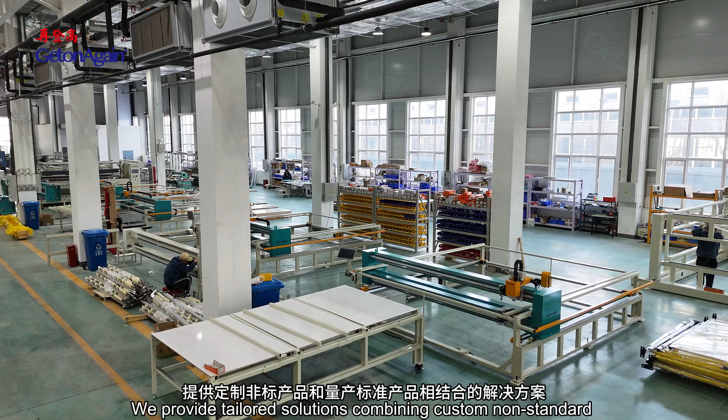We provide tailored solutions combining custom non-standard products with mass-produced standard products, including mechatronic machines, automated production lines, and intelligent factory solutions.

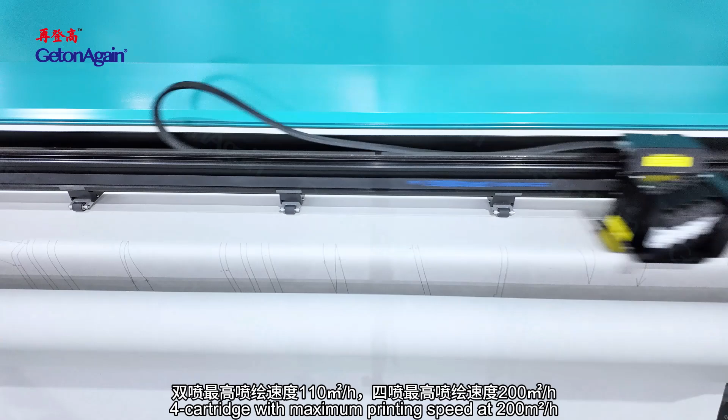Pattern room equipment includes magic inkjet plotter, 2 cartridge with maximum printing speed at 110 square meters per hour, and 4 cartridge with maximum printing speed at 200 square meters per hour.

Vertical inkjet cutting plotter, 1 machine multiple functions, pattern drawing with cutting, or standalone drawing. High-quality rotary cutting knife can cut minimum 80 grams per square meter paper for sample design, cost saving.

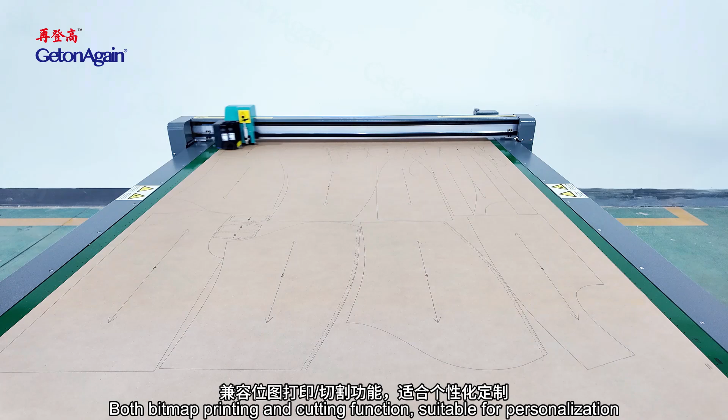Flatbed inkjet cutting plotter, both bitmap printing and cutting function, suitable for personalization, configured long knife or short knife, and optional fixed knife sleeve or elastic knife sleeve, suitable for cutting various materials.

Digitizer, easily reading paper patterns, convenient positioning, simple operation, accurately reading patterns, enables speeding up the design. It is a powerful tool for traditional manual drawing digitization.

Digitizer can be used in various fields, such as clothing industry, fashion design, surveying and mapping, mining, stamping and environmental protection, etc. Flatbed scanning digitizer.

One button to start after placing scanning pieces. Can vacuum absorption auto scanning, auto transmission. According to different models, supports ultra long width scanning. Scanning speed up to 7,200 mm per minute. Scanning resolution 150 to 300 dpi. High definition panoramic 1:1 image to ensure effective identification of various contours, notches, and inner holes.

Cutting equipment includes automatic spreading machine. Easily set the spreading method, length, speed, quantity and sections, with intuitive as well as simple operation. Dual use for both knit and woven fabrics, suitable for t-shirts, children's clothing, loungewear, and toy textiles.

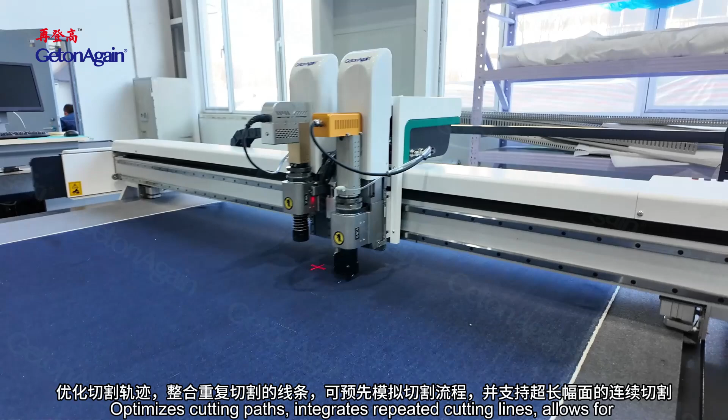Automatic single layer cutting machine. No need to create specialized cutting molds. Cutting can be performed precisely by directly importing CAD design drawings into the equipment. Optimizes cutting paths, integrates repeated cutting lines, allows for pre-simulation of the cutting process, and supports continuous cutting for extra long materials.

Stripe and plaid matching cutting machine, equipped with a few HD industrial cameras, according to the capture size, performs intelligent combination, ensuring high accuracy fabric image capturing.

Stripe and plaid matching auto cutter, equipped with double knives and pen draw punching working mode, special for various stripes and plaids fabric cutting in single ply.

High-end clothing customization: the effect of the alignment matched stripe and plaid process has become an important measurement of the quality of this type of clothing. Stripe and plaid auto cutter is the equipment specially developed for this process to meet matching stripe and plaid clothing, suitable for single ply cutting.

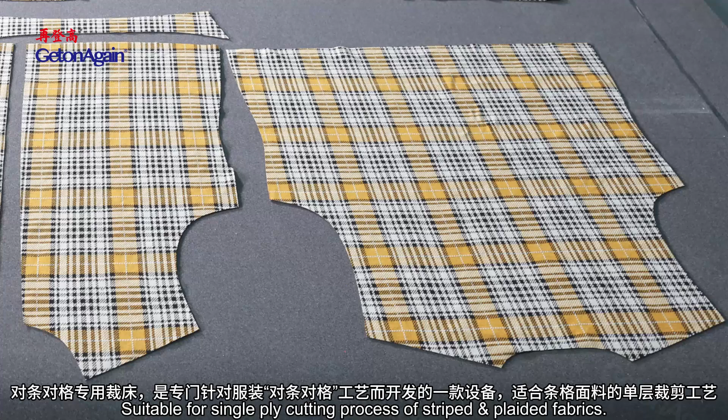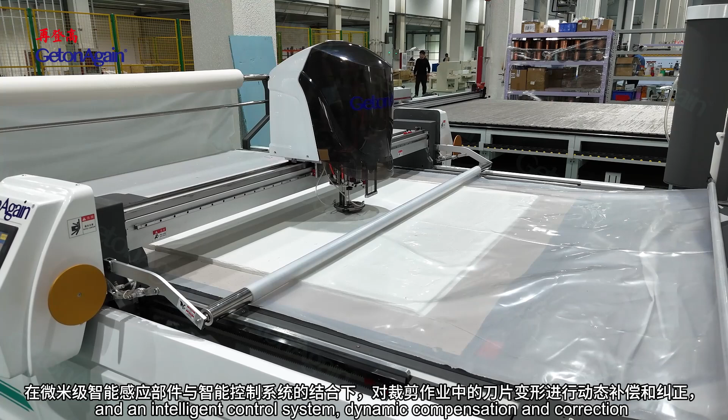Process of striped plaided fabrics. Automatic multi-layer cutting machine, through the combination of micron-level intelligent sensing components and an intelligent control system, achieves dynamic compensation and correction of cutter deformation during cutting operations, significantly reducing errors between the top and bottom layers of fabric during cutting, enabling truly high-precision intelligent cutting.

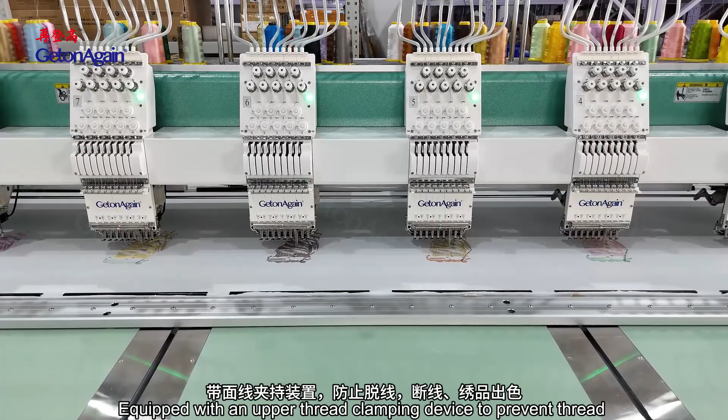Computerized embroidery machine: high-speed embroidery head with extremely low failure rates, long service life, low noise, and stable, reliable quality. Equipped with an upper thread clamping device to prevent thread detachment and breakage, ensuring excellent embroidery results. Suitable for textile and garment manufacturing, footwear, hats, bags, home decoration, automotive interiors, and industrial products area.

Embroidery equipment includes Cloud Smart Teaching Embroidery Machine, suitable for integrated theoretical and practical teaching of computer embroidery in fields such as fashion and apparel design, clothing design and engineering.

Computer Precision Embroidery Machine features a high-speed sewing head with extremely low failure rates, long service life, low noise, and stable, reliable quality, suitable for embroidering small letters, premium garments, high-end home textiles, footwear, hats, and automotive products with embroidery, etc.

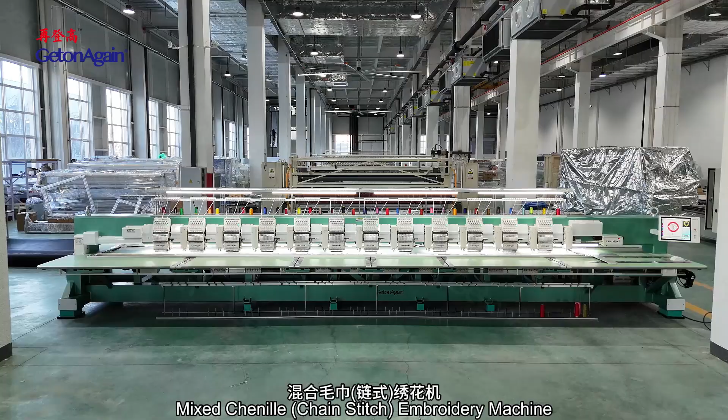Mixed chenille chain stitch embroidery machine. Mixed embroidery feature, according to color sequence settings, switchable between chenille embroidery and flat embroidery, simplified operation. Chenille needle height can be adjusted to 10 levels according to chenille pile height or chain stitch thread thickness.

Multifunctional embroidery on garment, shoes, caps, home textile, toys, bags and luggage, art craft, etc.

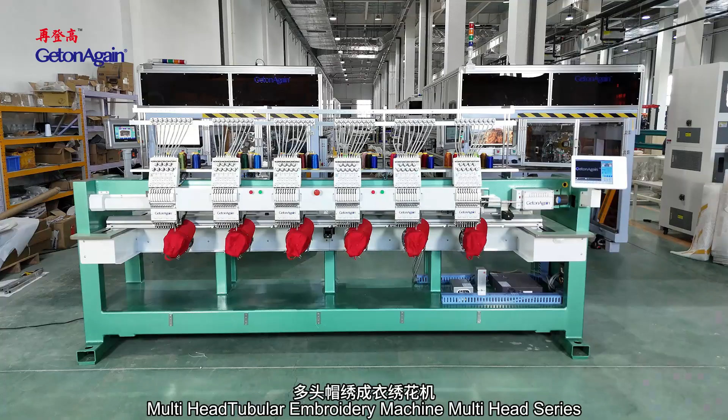Multi-head tubular embroidery machine, multi-head series, suitable for embroidering on flat, caps, garments, shoes, belts, bags, etc. Auto thread trimmers, auto color change, auto thread break detection, 270 degree wide angle cap system, red light locating, LED lighting, precise head and drive system to ensure exquisite embroidery work.

Drop tables, easy to lift up and down. Multiple heads greatly improve work efficiency, suitable for embroidery shops and factories of a certain scale.

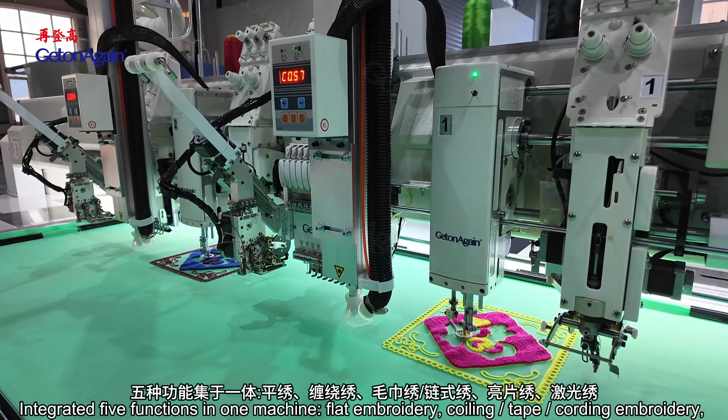Computerized 5-in-1 embroidery machine integrates 5 functions in one machine: flat embroidery, coiling, tape cording embroidery, chenille and chain stitch embroidery, double sequin device, and laser cutting function. High precision, strong stereo sense, ideal artistic effect, suitable for embroidery of apparel, home textile, furniture, teaching, design and arts and crafts, etc.

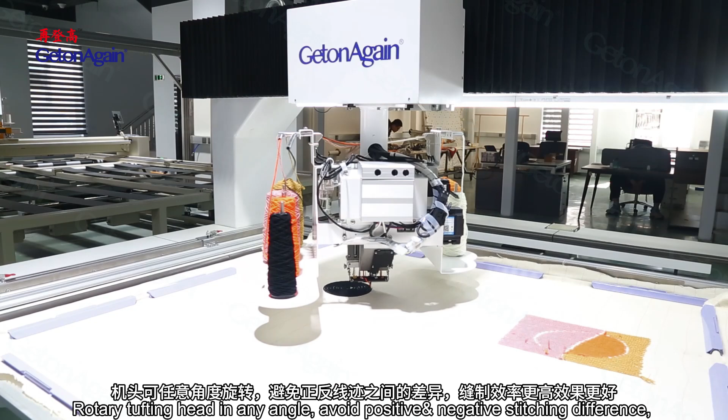Tufting series equipment includes computerized tufting machines with a rotary tufting head that rotates to any angle, avoiding positive-negative stitching differences, resulting in higher efficiency and better tufting results. Suitable for various rugs, carpets, hanging carpets, tapestry, and other flooring decorative and home furnishing products tufting.

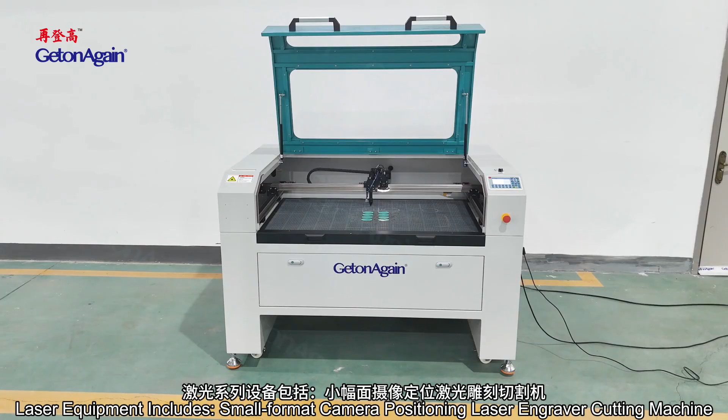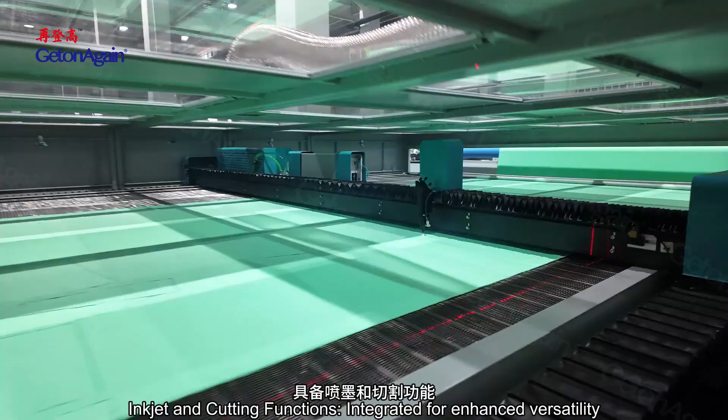Fully automatic large format laser cutting machine with inkjet device. Large format automatic feeding system designed to meet requirements for feeding and cutting whole rolls of fabric. Inkjet and cutting functions integrated for enhanced versatility. Applicable to industries such as custom clothing, single-piece cutting, sofas, toys, footwear and headwear, textile print pattern positioning cutting, automotive interiors, industrial filtration, and advertising, etc.

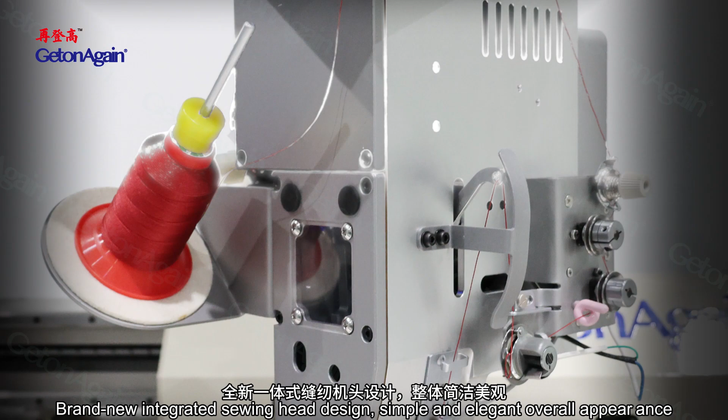Sewing equipment includes an automatic arbitrary rotary single needle leather sewing machine, suitable for automated leather pattern sewing in the fields of automotive interiors, car seat covers, car door panels, airplane seats, and leather furniture upholstery. Brand new integrated sewing head design, simple and elegant overall appearance.

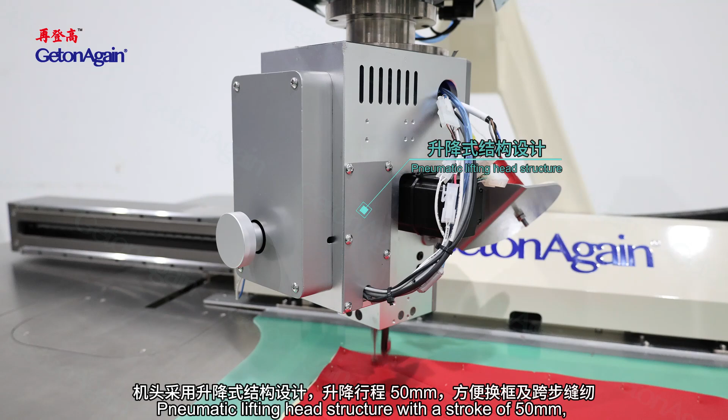15-inch HD industrial touch control screen. Two-size workbenches designed with a flexible mechanism, reducing size after folding for easier transportation. Sewing head can rotate at any angle, avoiding differences between forward and reverse stitches, improving sewing efficiency and stitch quality. Pneumatic lifting head structure with a stroke of 50 mm, making frame changes and span sewing more convenient.

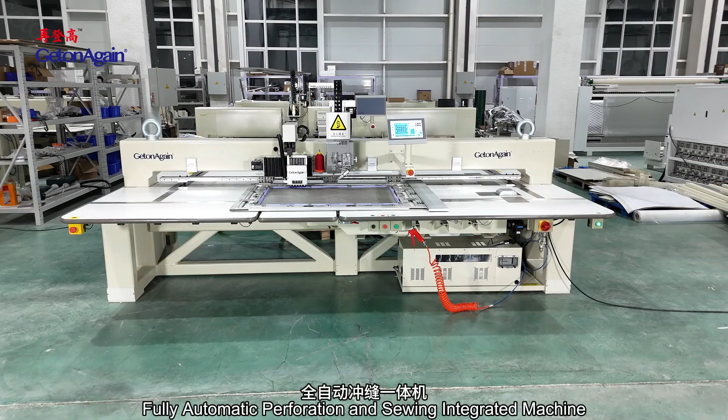Fully automatic perforation and sewing integrated machine. The punching machine head is specifically designed and developed for leather materials, equipped with various round punching tool specifications. Sewing head up moving stroke is 50 mm, providing sufficient space for material loading and easy operation. Suitable for perforation and sewing processes of various types and thicknesses of genuine leather and microfiber leather used in car seats, automotive interiors, aircraft seats, luggage, furniture, and more.

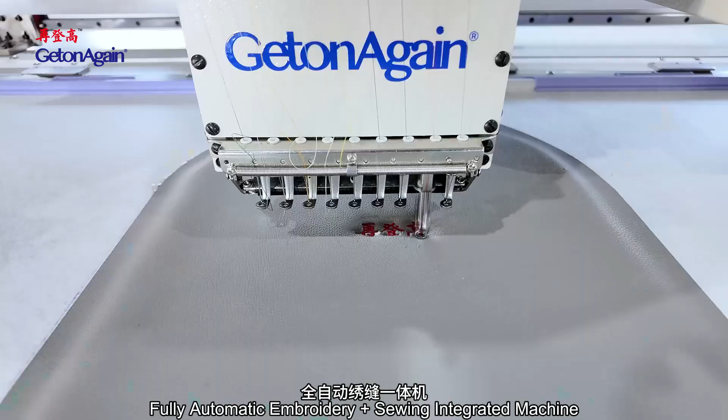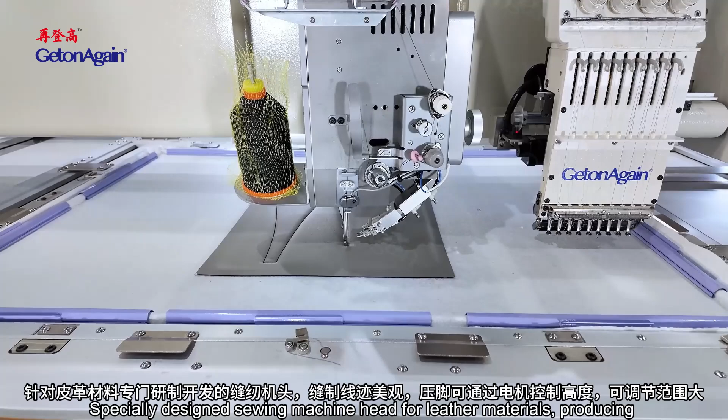Fully automatic embroidery and sewing integrated machine. 9-color embroidery machine head to meet the embroidery needs of different industries. The embroidery thread clamping mechanism incorporates a novel upper thread clamping assembly, effectively reducing thread breakage and slippage occurrences during operation. Specially designed sewing machine head for leather materials, producing beautiful stitching.

Presser foot height is motor controlled and highly adjustable. Sewing machine head has an up-down moving stroke of 50 mm, providing ample space for material loading and ease of operation. Suitable for various types and thicknesses of genuine leather and microfiber leather for automotive seats, car interiors, aviation seats, luggage, furniture, etc., combining embroidery and sewing processes.

Fully automatic perforation special hole and embroidery and sewing rotating head machine. Integrates punching, embroidery, and sewing into one machine, allowing for arbitrary pattern design and seamless combinations of punching, embroidery, and sewing for complex processes.

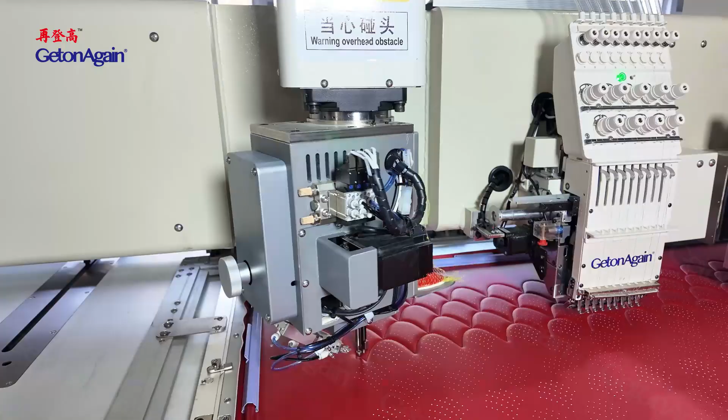Specially developed punching machine head for leather materials. The 9-color embroidery head meets the embroidery needs of various industries. Sewing machine head features an arbitrary rotation structure, creating beautiful stitching, reducing frame movement frequency, and improving efficiency. Suitable for punching, embroidering, and sewing processes for various types and thicknesses of genuine leather and microfiber leather used in automotive seats, car interiors, aviation seats, luggage and furniture, etc.

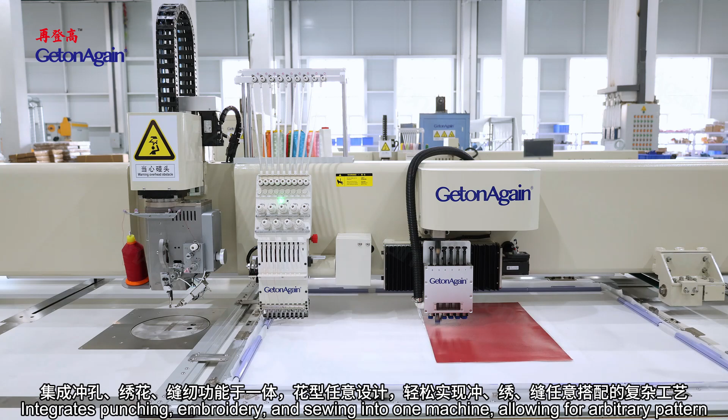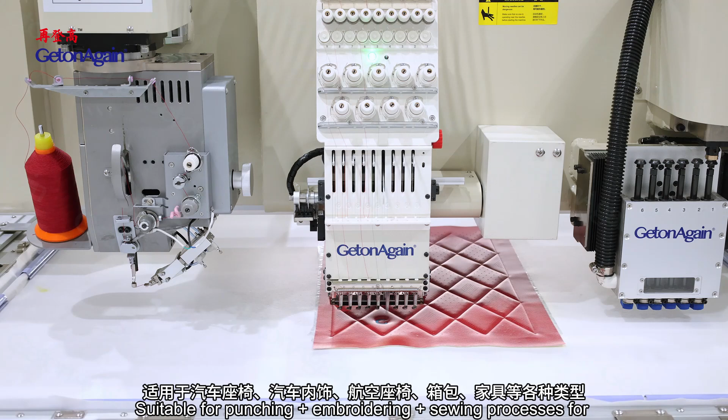Fully automatic perforation round hole embroidery sewing rotating head machine integrates punching, embroidery, and sewing into one machine, allowing for arbitrary pattern design and seamless combinations of punching, embroidery, and sewing for complex processes. The 9-color embroidery head meets the embroidery needs of various industries. Sewing machine head features an arbitrary rotation structure, creating beautiful stitching, reducing frame movement frequency, and improving efficiency. Suitable for punching, embroidering, and sewing processes for various types and thicknesses of genuine leather and microfiber leather used in automotive seats, car interiors, aviation seats, luggage and furniture, etc.

Automatic template sewing machine, rotary head, heavy material. Both the X and Y axis use a screw and slide transmission method, providing high precision and good stability. Suitable for pattern sewing on leather and heavy materials, such as car seats, sofas, massage chairs, boat interiors, and aircraft seats. The machine head can rotate freely to ensure the quality of the sewing stitches.

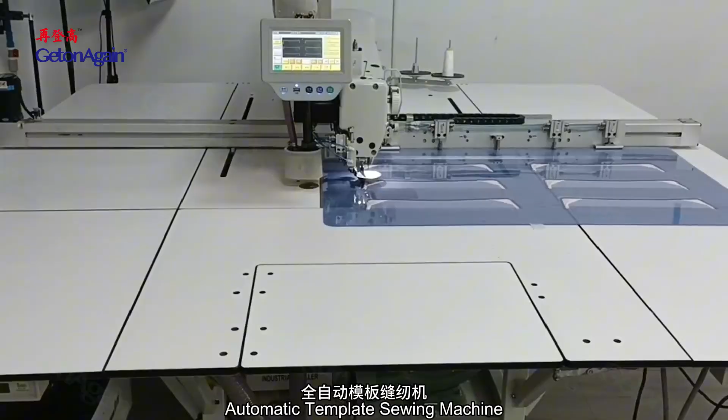Automatic template sewing machine with double belt, double guide rail, double stepper motor structure. The machine head adopts oil-free lubrication, and the rotary shuttle adopts oil-line lubrication technology to completely eliminate fabric pollution. Identify patterns through RFID barcodes and automatically switch to the corresponding sewing program for quick sewing. Used for template sewing processes such as opening pockets, notches, bag covers, collar trimming, etc.

Pattern sewing machine: this machine can easily sew 1,200 thick thread with a thickness of 12 mm, with 2 times large rotary hook, automatic thread trimming, and maximum sewing speed reaching 2,500 RPM.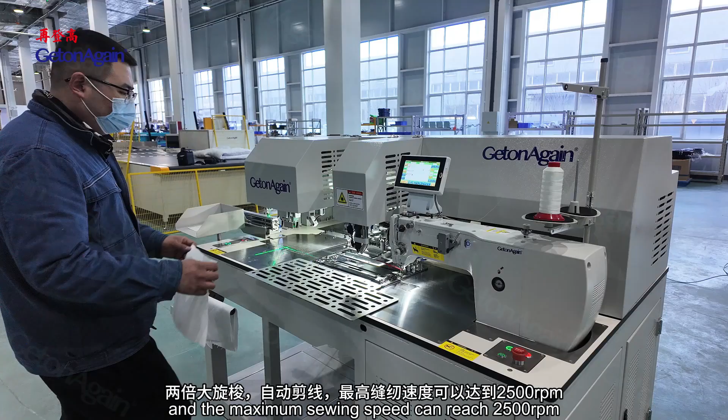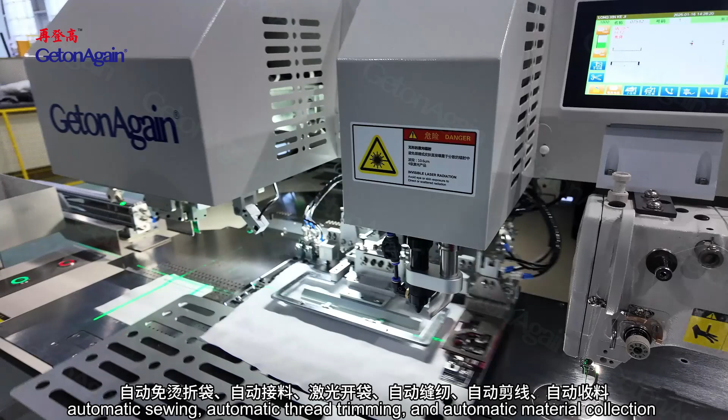Automatic laser pocket opening machine: automatic ironing-free pocket folding, automatic material feeding, laser pocket opening, automatic sewing, automatic thread trimming, and automatic material collection. For front and back pockets of men's and women's clothing, suits, inner and outer pockets of jackets, dress pants, hoodies, sun protection clothing, school uniforms, sportswear, cotton padded jackets, down jackets, workwear, jackets, uniforms, trench coats.

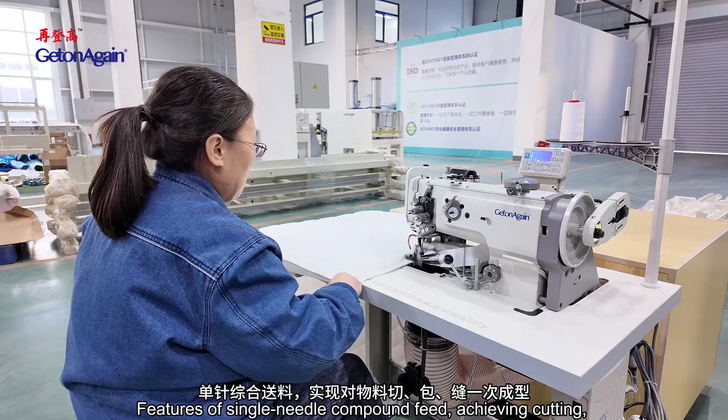Quilt edge binding machine, featuring single needle compound feed, achieving cutting, binding, and sewing in one seamless operation.

Enlarged right side waste discharge port with pneumatic waste discharge assistance ensures smoother disposal of waste generated during edge cutting. Special synchronized feeding structure includes alternating presser foot, needle, feed dog, and binding attachment, ensuring no wrinkles or misalignment during straight line or corner sewing for a flawless binding effect. Designed for edge binding processes of quilts such as cotton quilts, summer quilts, spring and autumn quilts, and other bedding items.

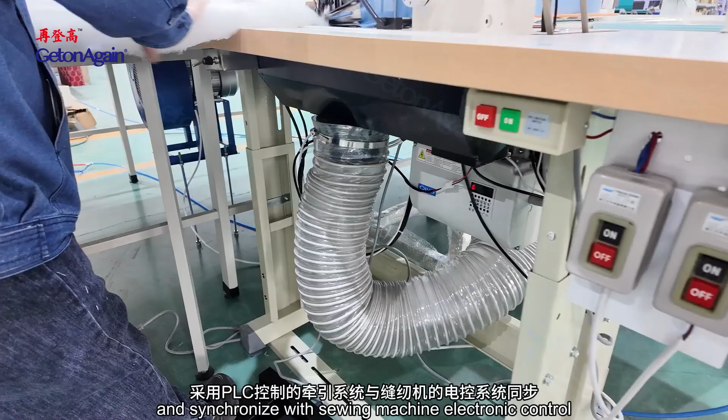Quilt and mattress binding with pulling sewing workstation. Equipment factory standard provides an air floating table and automatic pulling device, making sewing worker operation easier and smoother. Equipped with PLC controlled pulling device synchronized with the sewing machine's electronic control, these two machines work at the same speed and synchronize direction. Optional automatic storage and vacuuming device improves efficiency, reduces dust emissions, and provides the sewing operator a clean and tidy working environment.

Binding result is rich with a strong, solid feel. Corners are smooth and nice, with evenly stitched lengths, no hairy edge, no edge folding, and no corner raising effect or other negative symptoms.

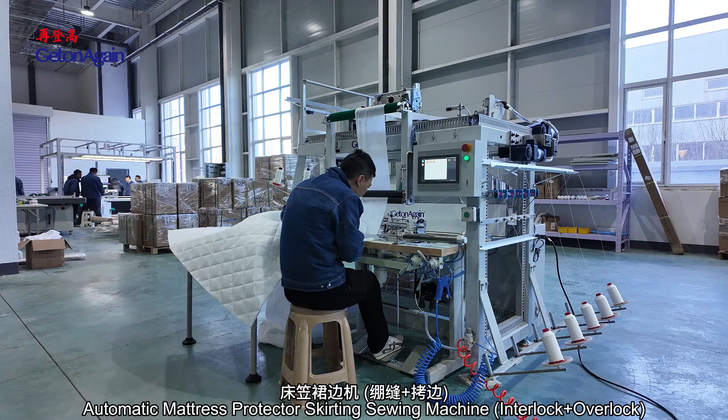Automatic mattress protector skirting sewing machine, interlock and overlock. Suitable for processing fitted sheets, completing in one pass the binding stitching of elastic rope cord and bed skirt, and the overlocking of bed skirt to mattress protector topper layer.

Multi-hole bar tacking machine: press arm and sewing frame work synchronously, ensuring high precision bar tacking. Suitable for chair pads, cushions and pillows with fillings, and bar tacking requirements for reinforcing sewing work.

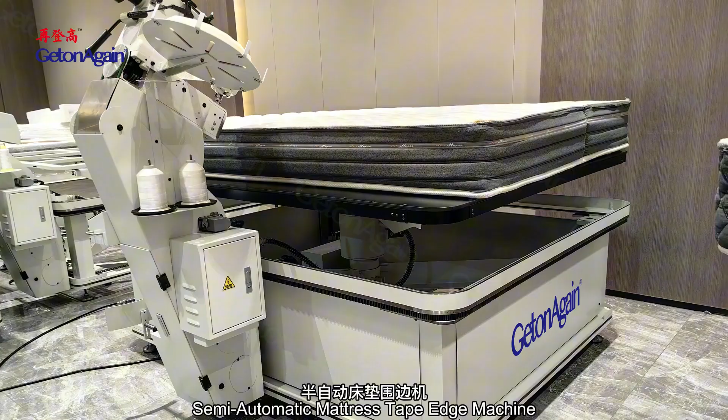Semi-automatic mattress tape edge machine, primarily designed for sewing spring mattresses, efficiently completing edge overlocking between mattress fabric and sidewall fabric. Also suitable for sewing other types of mattresses and sofa cushions. Key features include an electrically adjustable work table with high strength independent support, ensuring exceptional stability during operation.

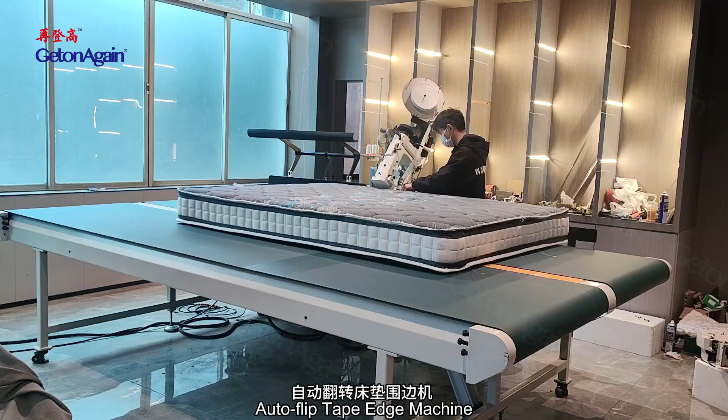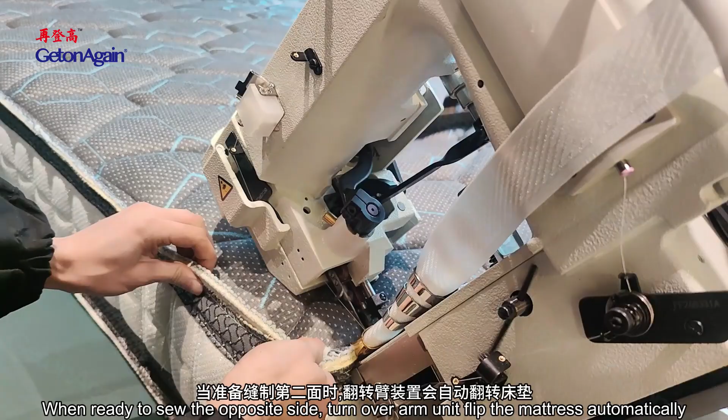Auto flip tape edge machine: automated transfer table and mattress turnover arm enable the operator to work in one position without moving around. Variable speed drive automatically slows down on turning corners, and the machine head can rotate freely to ensure the quality of sewing stitches. When ready to sew the opposite side, the turnover arm unit flips the mattress automatically. Machine head height and inclination are adjustable.

Industrial sewing machines include various overlock and lock stitch machines.

Computerized synchronized hot cutting binding machine, designed for products requiring binding processes, equipped with a standard pneumatic hot cutter. The binding tape no longer requires manual cutting; simply press a button to complete precise cutting. The hot cutting edges are clean, with no fraying or loose threads, significantly improving production efficiency.

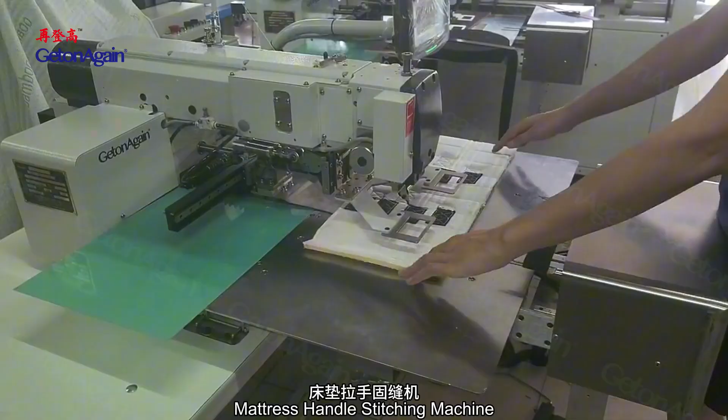Mattress handle stitching machine: fully automatic operation, controlled via touch screen. Customized stitching patterns are possible, significantly improving production efficiency. Easy to operate, with precise positioning.

Flat tape edge machine, mainly used for stitching between mattress fabric and side border, suitable for sewing other soft mattresses, bedding, sleeping bags, and tents. Stable performance, little vibration, low noise, and high efficiency.

Long arm label sewing machine, adopting connecting rod thread pickup with a large rotary hook. The needle bar swings up and down, feeding simultaneously to form zigzag lock stitch. A reasonable swing mechanism makes switching between zigzag sewing and normal lock stitch easy and free. Upper and lower synchronous feeding structure makes it easy to operate, with good sewing effect and beautiful stitches.

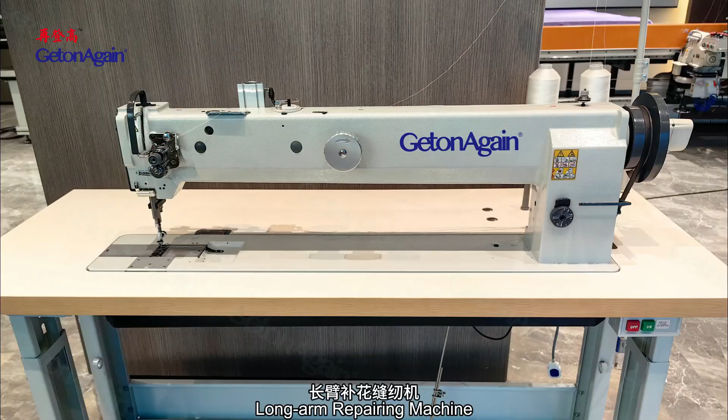Long arm repairing machine, mainly used for applique work on mattress crepe fabric. The upper and lower shafts of the machine are of integral structure, and a Taiwan-made servo motor is used to automatically position the needle. The new presser foot is equipped with a needle bar lifting device to make thick fabric application more convenient and beautiful.

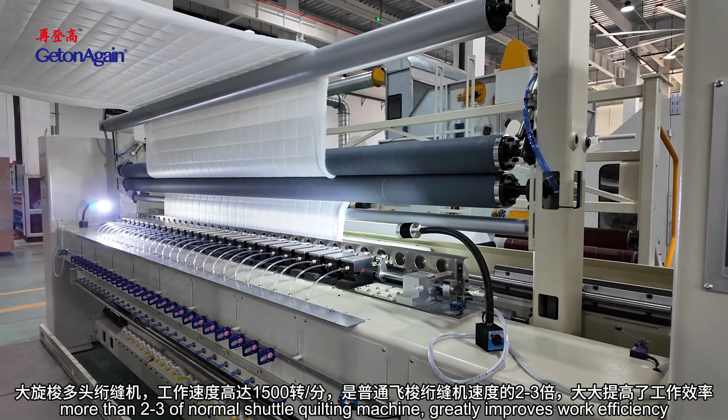Quilting equipment includes the computerized multi-head rotary hook quilting machine model and double row lock stitch multi-head quilter with large rotary hook. Max speed of 1500 RPM, more than 2 to 3 times that of a normal shuttle quilting machine, greatly improving work efficiency. A 3-fold capacity rotary hook means less bobbin changing frequency, beautiful stitches, no lost stitch, and no thread loops.

Computerized multi-head rotary hook quilting machine model E features a 5-time jumbo rotary hook, less bobbin changing frequency, beautiful stitches, no lost stitch, no thread loops. The interval between the upper and lower needle bars can be adjusted to any value from 3 to 9 inches. The lower needle bar can move half a needle pitch in the X direction, so quilting needle bars of different sizes and patterns can be combined, especially for non-standard size patterns, achieving a unique effect.

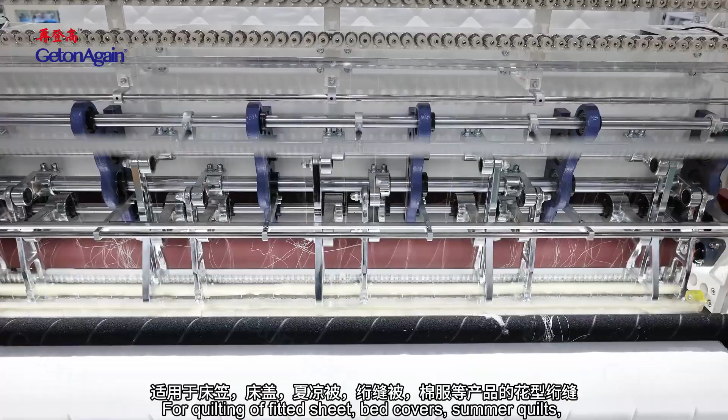Computerized multi-needle shuttle quilting machine, flying shuttle, for quilting fitted sheets, bed covers, summer quilts, and clothing products with quilting patterns.

Computerized multi-needle chain stitch quilting machine. Servo motor-driven rollers and lead screws ensure precise quilting patterns, suitable for mattresses, mattress covers, sofas, bedding, home textiles, and home decor.

Computerized single needle quilting machine lifting head. The extendable quilting frame can be freely adjusted according to required size. GetonAgain quilting head with independent presser foot drive, suitable for various materials with different thickness.

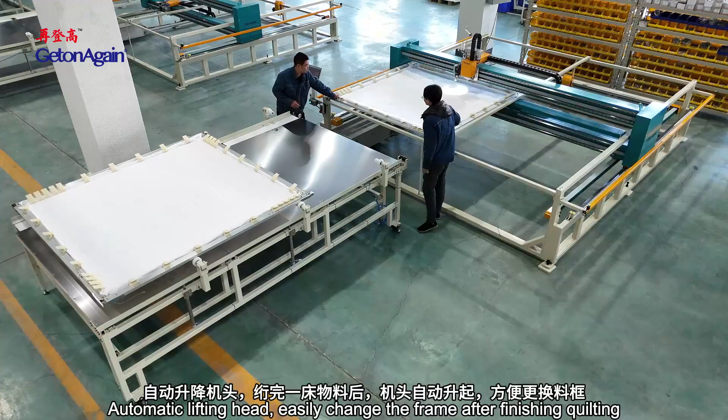Full servo motor control provides powerful and accurate driving force. Automatic lifting head easily changes the frame after finishing quilting. New quick frame changer optional. Quilting process for home textile products such as quilts, comforters, mattress protectors, blankets, sleeping bags, and single needle art quilts.

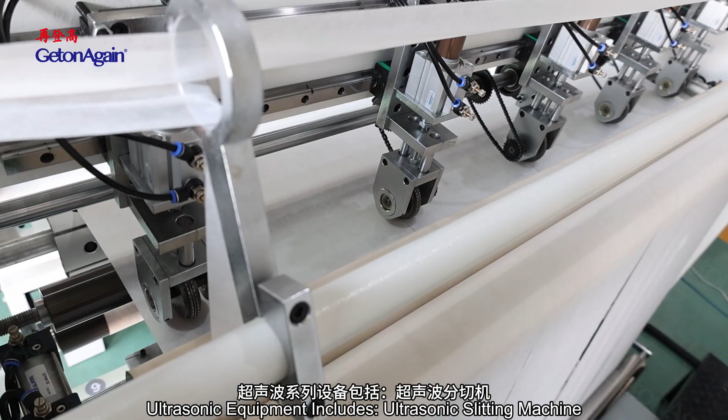Ultrasonic equipment includes ultrasonic slitting machine, adopting ultrasonic cutting technology. This ensures smooth cutting edges, precision edge cutting, no deformation, no fraying, no fiber pull, and no edge curling problem after cutting. Cutting rollers and patterns can be customized to meet various needs.

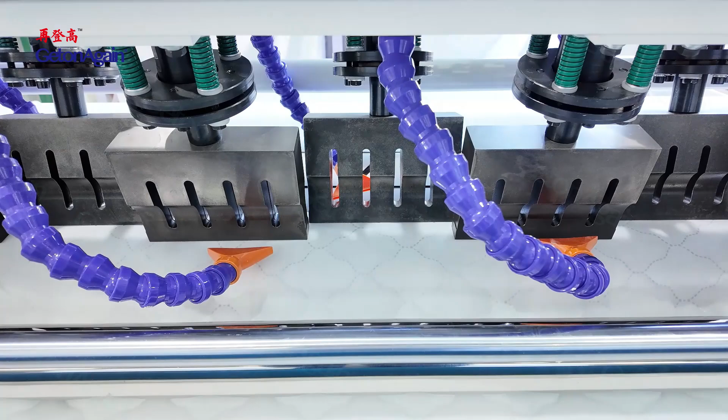Automatic ultrasonic quilting machine integrates ultrasonic sewing and ultrasonic edge sealing and cutting automation into one, completing the process in a single step. The latest structure design with interleaved transducers ensures embossing seamless non-wrinkles. After quilting, it can be connected with a cutting machine for the finished product or a rewinding device for fabric rolls.

Ultrasonic quilting machine bonds multi-layers of polyester fabric, non-woven fabric, polyester wadding, or artificial leather, and embosses different patterns on it. Patterns are clear and beautiful, fabric doesn't deform, with strong bonding and high efficiency.

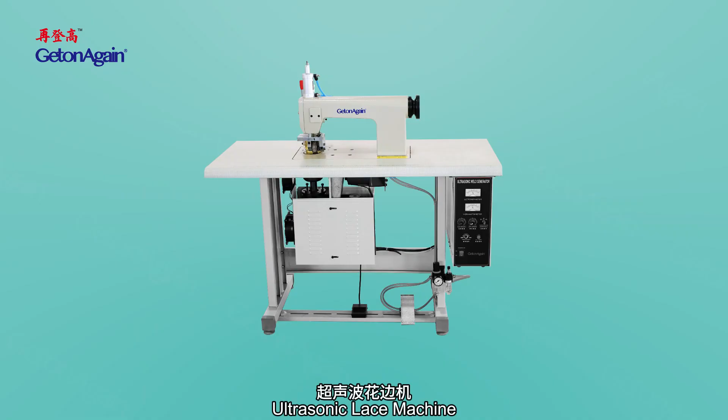Ultrasonic lace machine with ultra-high power output and adjustable power to meet the welding and cutting requirements of different materials and thicknesses. Mold size ranges from 23 to 60 millimeters.

Mold lifting system with options for manual or pneumatic operation. Stripping allows simultaneous single or multi-strip cutting with edge melting treatment for clean, burr-free edges. Pattern molds and welding heads undergo special hardness treatment for higher wear resistance. Various patterns can be customized as needed.

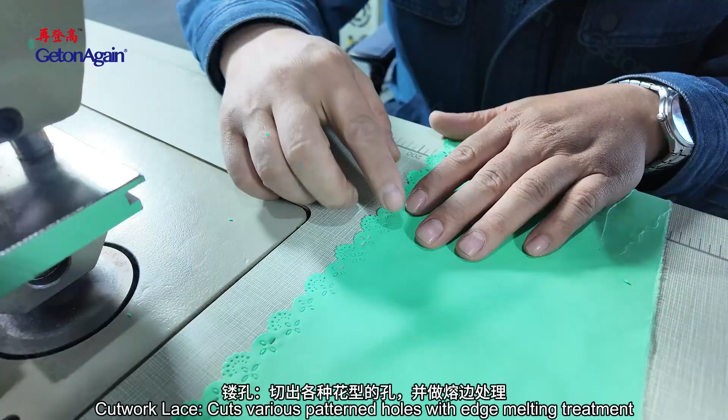Cutwork lace cuts various patterned holes with edge melting treatment, with high running speed and simple operation. Bonding seamlessly fuses two or more layers of fabric together without thread or needles, ensuring strong welding strength.

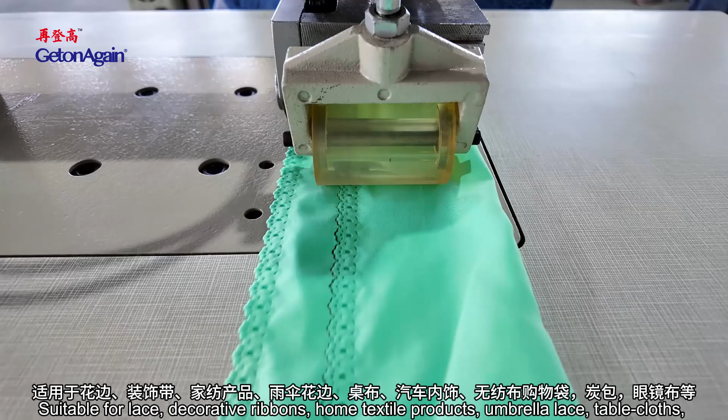Forming, cutting, bonding, and embossing in reduced steps. Edge cutting, straight or curved, single edge cutting with edge melting treatment ensures smooth, neat, burr-free edges. Suitable for lace, decorative ribbons, home textile products, umbrella lace, tablecloths, automotive interiors, non-woven shopping bags, carbon bags, eyeglass cloth, etc.

Visual recognition and inspection equipment includes cut piece visual inspection instruments. After manual placement, one-click start allows for automatic scanning, automatic inspection of cut pieces, and automatic data storage.

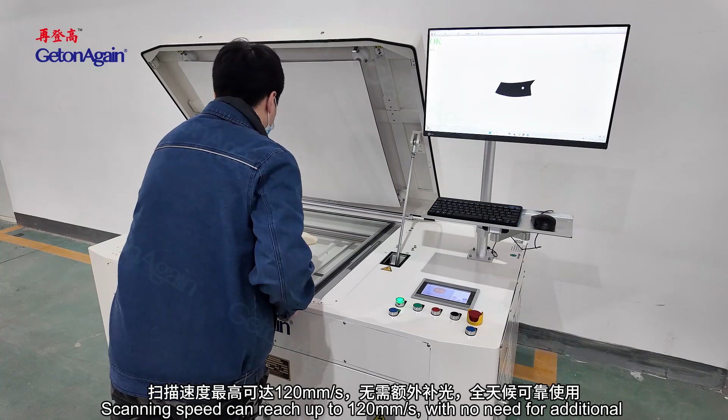Scanning speed can reach up to 120 millimeters per second, with no need for additional lighting, ensuring reliable use in all weather conditions. Scanning resolution is 150 to 300 dpi, and the high-definition panoramic one-to-one image ensures the inner and outer contours of the cut pieces are clearly visible.

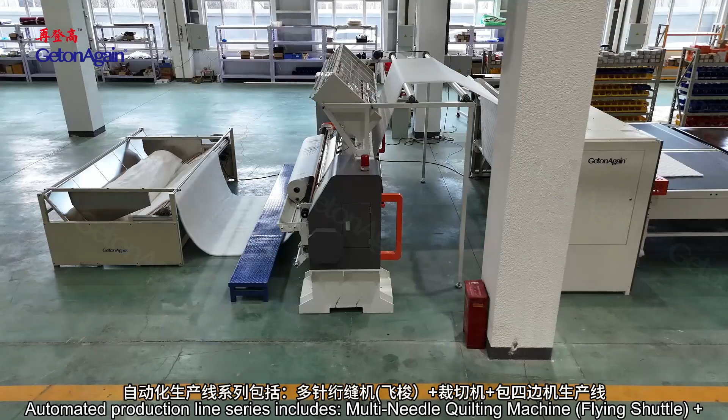Automated production line series includes multi-needle quilting machine, flying shuttle and cutting machine, and 4-side tape binding machine production line. The multi-needle quilting machine quilts and fixes lock stitches on raw materials, mainly used to process quilt cords and cushions. The cutting machine cuts the quilted semi-finished materials, including trimming, fixed length cutting, slitting, rolling, and other functions.

Alignment platform: material transfer alignment mechanism. The cutting block waits to enter the next sequence on this platform, and at the same time is aligned with the subsequent reference processing position by translation.

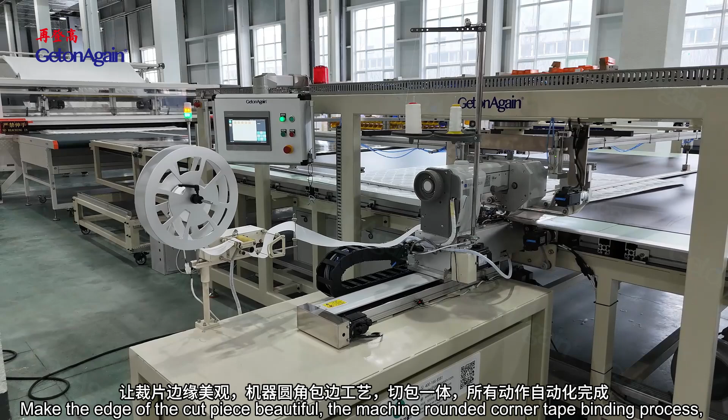Automatic tape binding machine processes the cutting piece, making its edge beautiful through a rounded corner tape binding process. Cutting and tape binding are integrated, with all actions completed automatically.

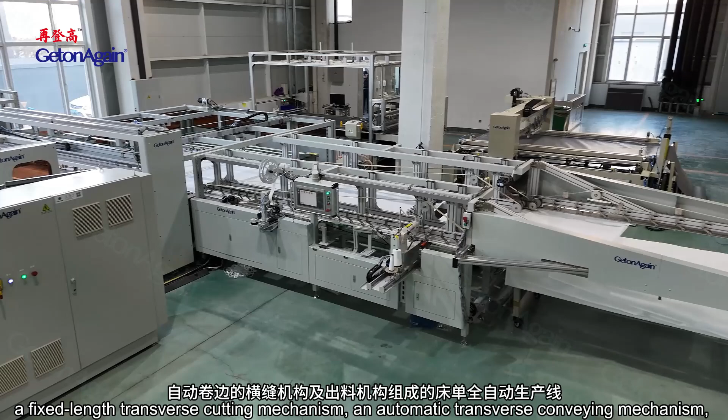Automatic bed sheet production line: a fully automated system composed of a feeding mechanism, an adjustable width longitudinal sewing mechanism, a fixed length transverse cutting mechanism, an automatic transverse conveying mechanism, an automatic hemming transverse seam mechanism, and a discharging mechanism.

Automatic blanket straight corner binding machine, capable of holding 2 rolls of non-elastic fabric, equipped with edge alignment function, automatically pulls and cuts into panels. Pulling length can be set freely. 4-side tape binding sewing process for inelastic blankets. Home textile comb cotton production line.

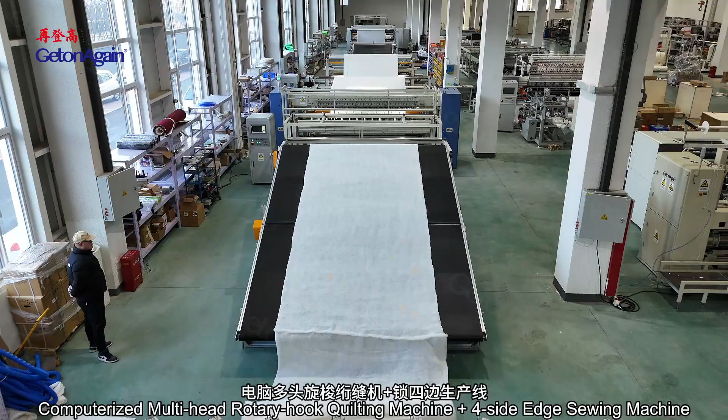Computerized multi-head rotary hook quilting machine and 4-side edge sewing machine, capable of quilting patterns in various sizes without changing needle positions, greatly enhancing operational efficiency. The double row machine's lower needle row can move half of the head distance in the X direction, creating combination patterns of different sizes when coordinated with the upper needles.

Longitudinal sewing uses double chain stitch, with optional lock stitch or overlock stitch. Transversal sewing uses multi-needle chain stitch sewing. Transversal cutting occurs between the 4 stitches, cutting as per set length and feeding to the next sequence.

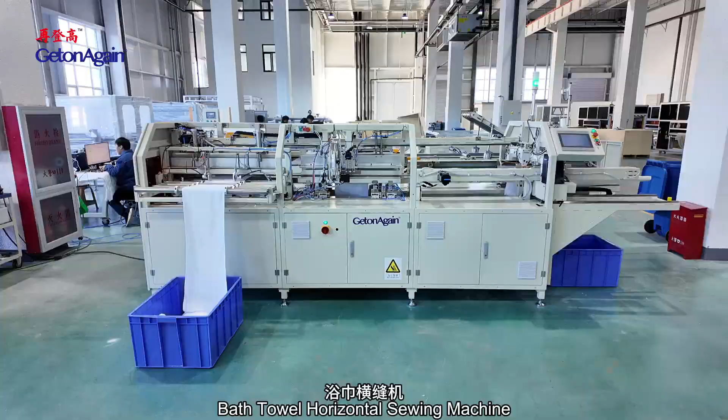Bath towel horizontal sewing machine, folding and sewing process for inelastic towels.

Pre-sewing auxiliary equipment includes automatic edge alignment, relaxing machine, and air blowing. Roll fabric is unmounted and folded into a flat fold state. To achieve tension-free fabric placing, a wave-type air blowing device is used. In the loosening fabric process, fabric is relaxed by the blowing device.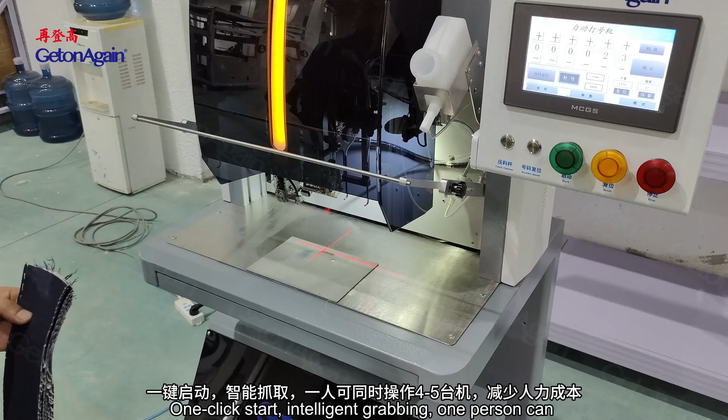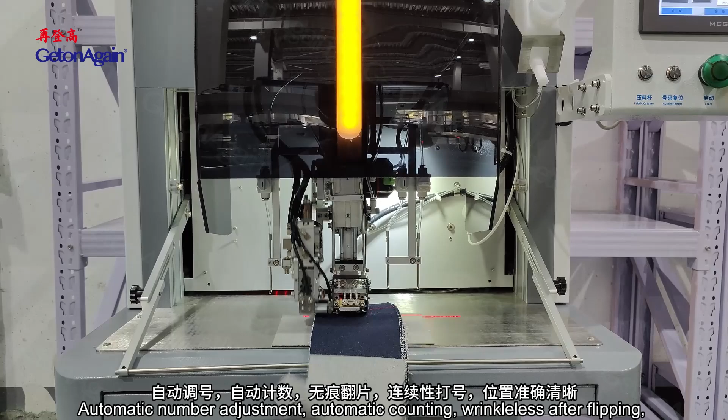Automatic marking machine, one-click start, intelligent grabbing. One person can operate 4 to 5 machines at the same time, reducing labor costs. Automatic number adjustment, automatic counting, wrinkleless after flipping, continuous numbering, accurate and clear position. The cutting piece for jeans, shirts, workwear and down, etc.

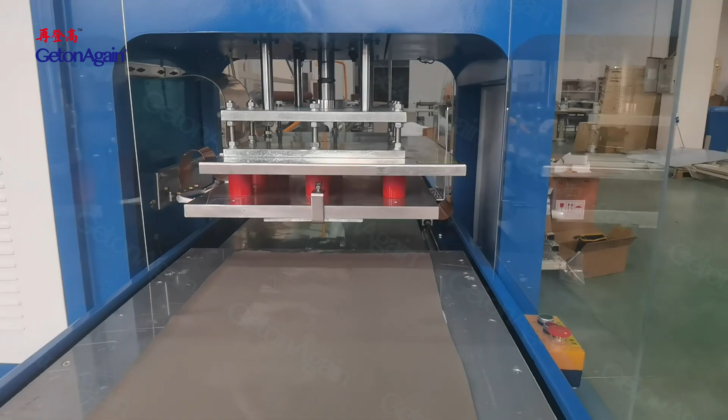High-frequency machine, built-in stepless heating system with adjustable temperature from 0 to 300, providing auxiliary heating to shorten processing time. Spark suppressor instantly cuts off current during sparking to prevent damage to molds and materials. Automatic overcurrent protection device protects electronic tubes and molds, extending their service life.

Embossing and stamping for car and motorcycle hood mats, blister packaging, plastic heat sealing and leather embossing.

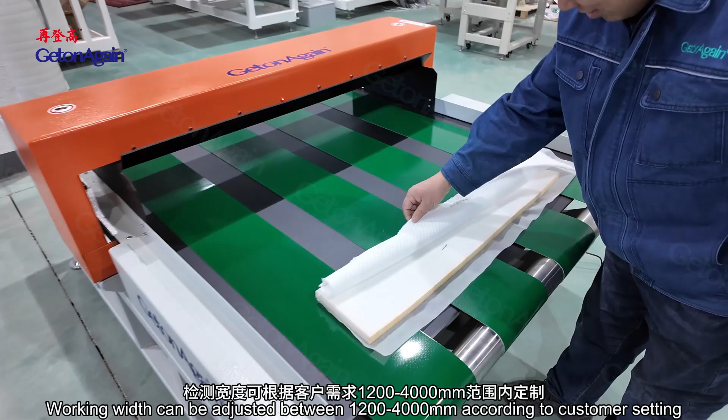Fully automatic winding machines. Post-finishing equipment includes a needle detector, applicable for large bulky products with ferromagnetic metal detection, for example bedding, etc. Working width can be adjusted between 1,200 to 4,000 millimeters according to customer setting.

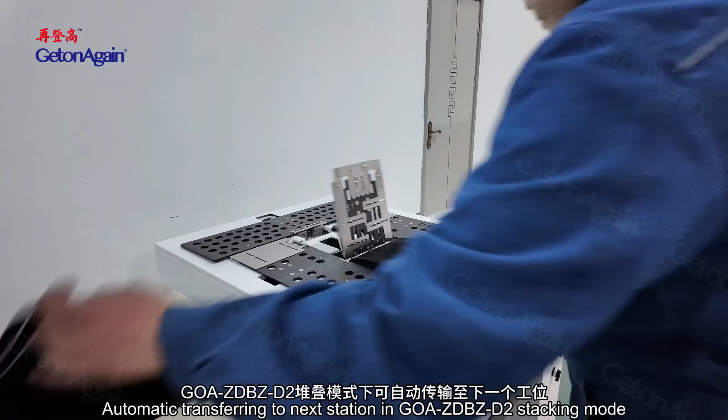Automatic folding and packaging machine, economical, small floor space, simple operation, standard folding effects, automatic transferring to next station in GOA-ZDBZ-D2 stacking mode. Two working modes, bagging and folding, are adjustable. Both folding width and length are adjustable within a certain range. Suitable for T-shirt, polo shirt, hoodie, thermal wear, pants and lightweight jacket, etc.

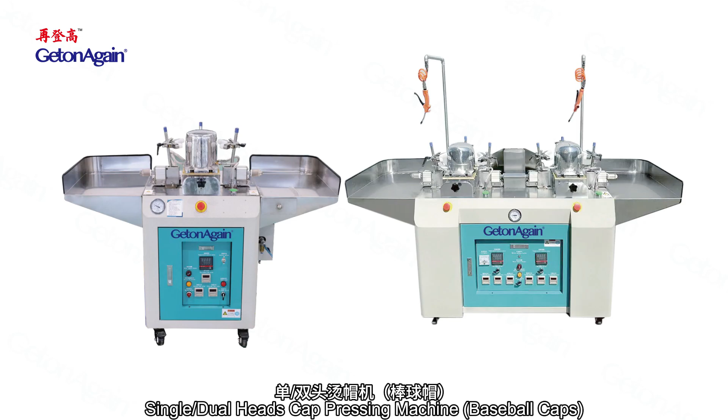Single and dual heads cap pressing machine for baseball caps. Steam time, cap clamping time, steam output, and air consumption can all be automatically adjusted. Built-in steam generator eliminates the need for an external boiler, with automatic water supply, suitable for bulk order production needs. Using a robotic arm, it can automatically grip the cap. Simply place the cap on the mold to complete the pressing process.

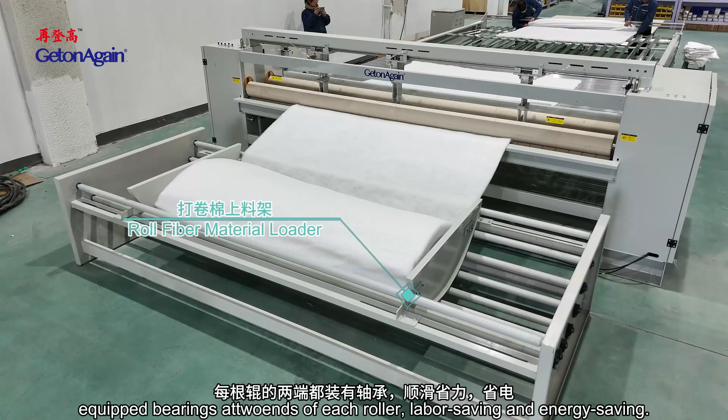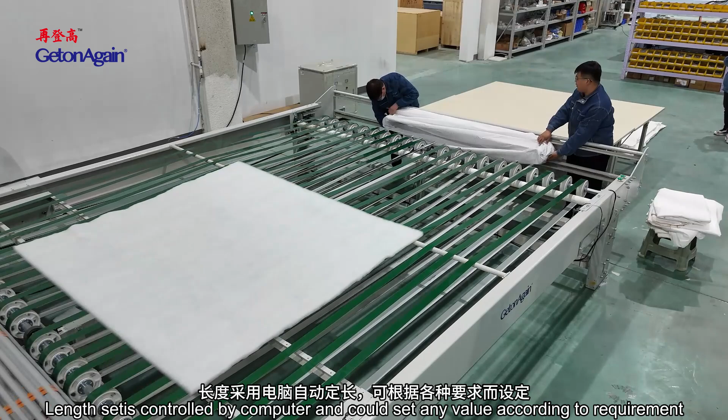Automatically feeding the wadding fibers into the comforter envelope case after cutting off. Length set is controlled by computer and could be set to any value according to requirement.

Quilt roll packing machine, suitable for rolling and packing of fluffy items such as quilts, pillows, cushions, etc., to reduce volume and storage, as well as lower transportation costs. The packing item is auto-fed from backward to forward by the belt during the compressing process and rolled to pack into the bag.

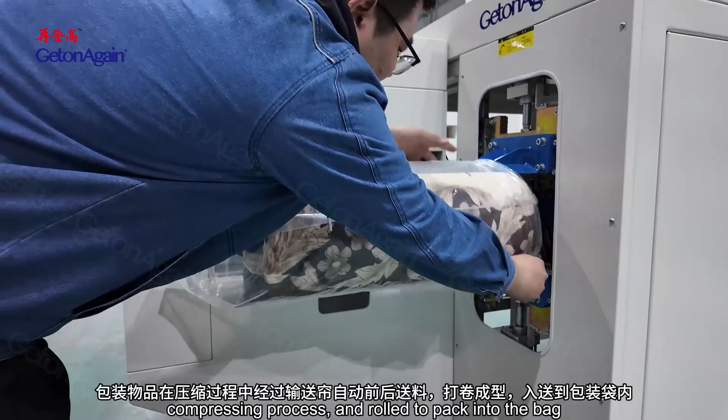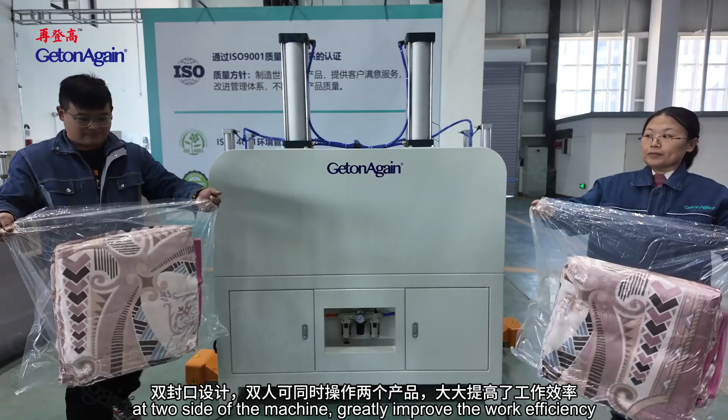Double cylinders, double operation, optional models. Double cylinders for double sealing, and single cylinder for single sealing. The double cylinder design increases the compression pressure and area. In the double seal design, two workers operate two products at the side of the machine, greatly improving work efficiency, suitable for compressed packing of pillows, cushions, bedding, plush toys and other products.

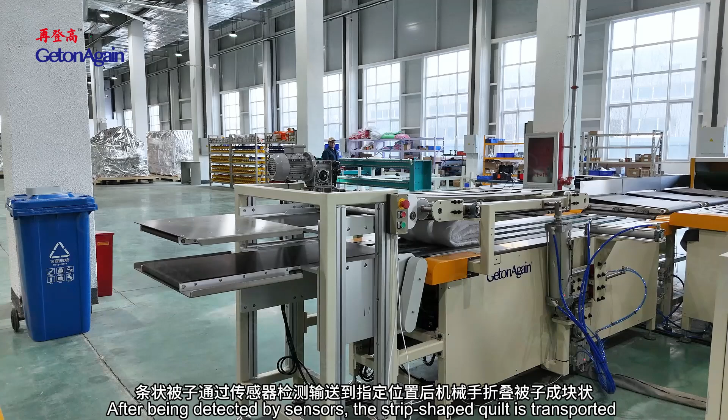Automatic folding and packaging machine, mainly composed of a folding device, rolling device, and stacking and compression conveyor device. Folding device: after the quilt is detected and transported to the designated position by sensors, a robotic arm folds the quilt into a strip shape. After being detected by sensors, the strip-shaped quilt is transported to the designated position and folded into a block shape by a robotic arm. Rolling device: the strip-shaped quilt is transported to the automatic rolling device to complete the rolling process.

Garment CAD includes garment CAD, super nesting, template CAD, intelligent tufting CAD, wire stitching CAD, perforation and embroidery CAD.

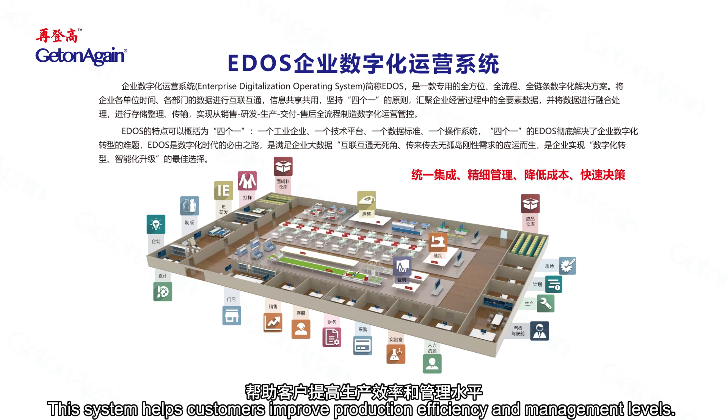In addition, GetonAgain has developed a digital operation and management system for industries such as garment processing and machinery manufacturing. This system helps customers improve production efficiency and management levels. Its features can be summarized as the four ones: one industrial enterprise, one technology platform, one data standard, and one operating system. It is the optimal choice for enterprises to achieve digital transformation and intelligent upgrading.

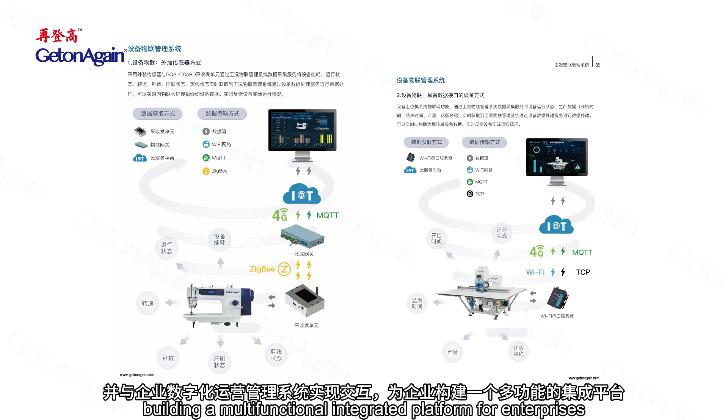Furthermore, by integrating Internet and IoT technologies, the company has developed an enterprise operating condition IoT management system, which enables the interconnection of all equipment, products, energy consumption, environment, and security within the enterprise. This system interacts seamlessly with the enterprise digital operation and management system, building a multifunctional integrated platform for enterprises. It enables functions such as data collection, real-time monitoring, data analysis, and remote management.